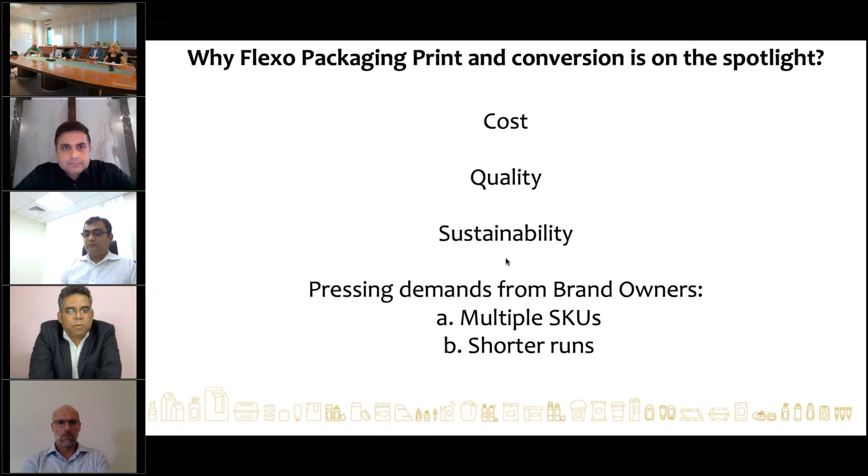Looking at some global trends within the Flexo print process: this is a $164 billion industry around the world, with a 2.6% CAGR expected in the next 5 years. If you look at the divide between Flexo and Roto as a process, North America, Europe, Asia, and Middle East and Africa are so much different. North America, being a very mature market for the past 15 to 20 years, has seen a great transition happening from Roto to Flexo, where Flexo has taken over almost 80% of the share.

80% of flexible packaging print is in Flexo now in North America, which is a great achievement. In Europe, it used to be driven by Roto, but now there's more balance and a move towards Flexo. In Asia, it's the opposite of North America, because of the higher volumes and population demand.

So Roto is still running high and demand for Roto is pretty high. But Flexo is growing at a much faster pace, and we see Roto gravure printers who already have gravure presses investing in Flexo presses to complement their long-run jobs. The long-run jobs run on Roto, whereas short-run jobs with multiple SKUs, they try to do with Flexo. Our panelists will share their thoughts on this.

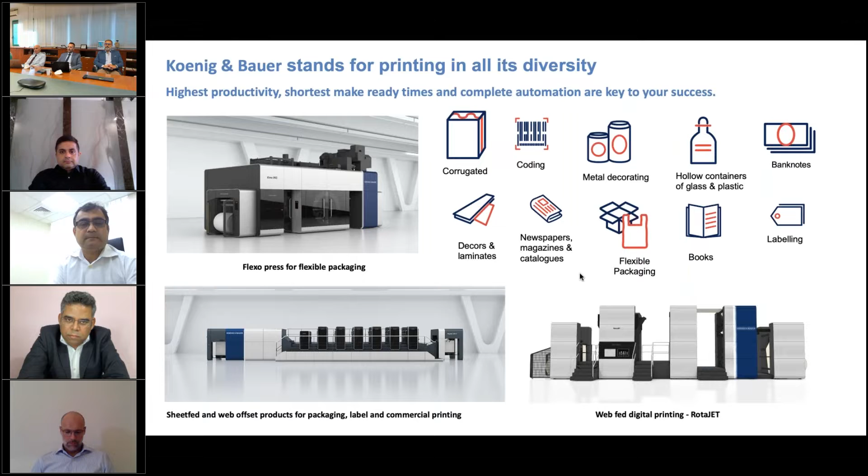But let me come back now to your question related to the growth in popularity of central impression Flexo press in the last years. I'd like to share with you the feedback that we got from our customers and from the market. I'd like to mention three different reasons.

The first one is flexibility. Flexibility means the big opportunity to use the Flexo printing machine with different types of inks, not only solvent, but also water-based inks or UV, can be traditional UV or UV LED inks, EB inks, and hybrid solutions. Hybrid means the possibility to use the same machine with a combination of different types of solutions.

But flexibility also means the possibility to print different types of substrates. Not only flexible packaging and plastic films, but also paper on the same machine, and alufoil starting from 12 microns.

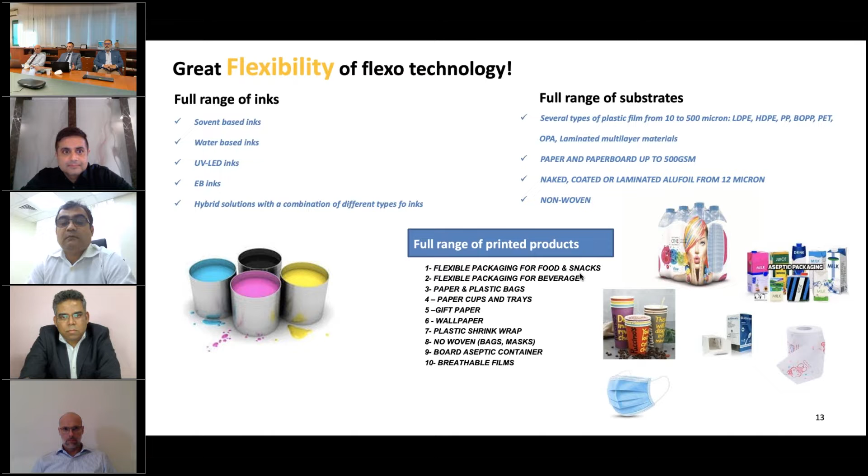So our customers can offer a big product portfolio: materials for flexible packaging for food, snacks, and beverage, paper and plastic bags, paper cups and trays, gift paper, wallpaper, plastic wrap. Nowadays, for example, masks, board aseptic containers, and breathable films. This is the first benefit, but now there is another important benefit I want to share with you.

Next is productivity and efficiency. In more than 40 years, we introduced many high technology features on our machines. Why? Because today, as you know, Flexo printing technology is very close to short run, so with two systems, these two devices, we reduce downtime of job change to a minimum.

The first one is the wash-up system, Speedy Clean. This is an automatic wash-up system that allows our customers to wash up the machine completely in less than 4 minutes. In many cases, the customer also needs to switch the machine from solvent to water-based inks or vice versa, and we can supply an additional independent washing inking system. In this case, the customer needs no more than 2 hours for the complete switch.

The second device we introduced is PrintTronic. PrintTronic is a Flexotecnica patented automatic impression setting system that we can supply on our machine. In less than 6 minutes, guaranteeing no more than 30 meters of material waste, all the pressure between the drum and the plates is completely set.

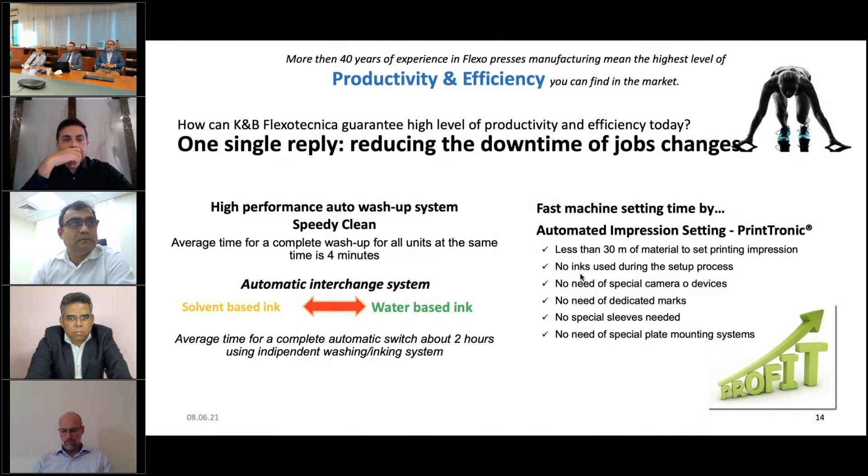The third benefit I want to mention is sustainability. Today for Koenig & Bauer, sustainability is one of the key drivers in the packaging industry. So how is Koenig & Bauer Flexotecnica improving sustainability in Flexo technology today?

I can mention just three ways. The first is developing, through strong cooperation with many partners and suppliers, new technology and processes creating bio-based and biodegradable plastic packaging. The second is continuous lightweighting of material in order to achieve the same performance but using less material.

The third way is pushing the market toward the use of barrier protection coating through some downstream installations in line, and also pushing the use of water-based instead of solvent, UV LED Flexo presses, and hybrid solutions.

Just to remember, Flexotecnica was the first company in the world to introduce the hybrid machine - hybrid meaning a machine designed to accept water-based and solvent-based inks at the same time.

And then what about green? How can we take care of the environment technically? I can mention three different points we offer today with our machines: the lowest emission, noise, and consumption. We optimize the ink and solvent use, and we minimize material waste.

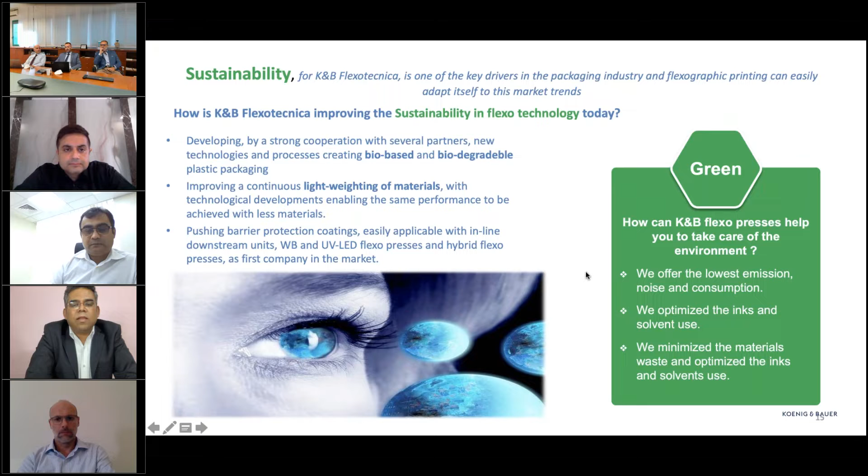Yes, of course. Koenig & Bauer Flexotecnica strongly believes that industrial analytics has never been as important as nowadays. I prepared just these two slides for you. In this way I can explain that in all our machines recently we introduced the new VPN system.

This device can easily monitor all the process data collected from the several sensors installed in all our machines. Then the customer can easily display all the production data, all the information concerning printing, production, and so on.

The customer can analyze all this information to optimize the process and reduce production costs. To be more technical, I want to list the information you can get on our machine - if you can show the next slide, please, Ben.

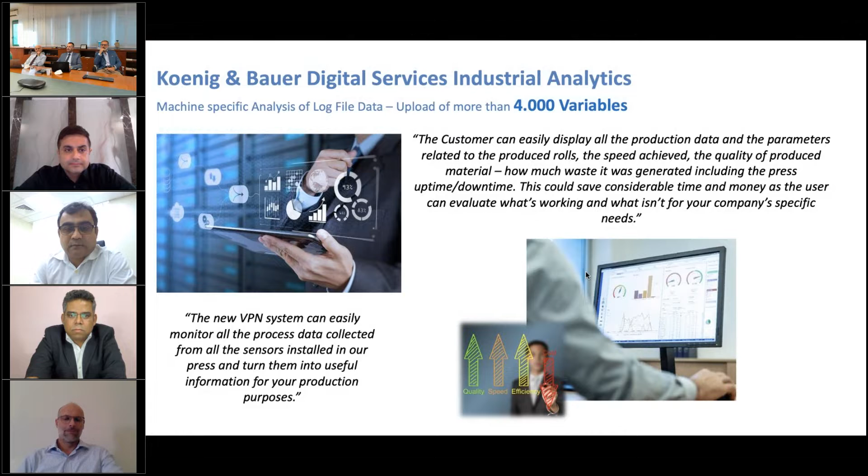Sure. Utilizing our software today, the customer can collect all the information on the consumption of inks, energy consumption, compressed air, waste, and solvent.

Another important thing is that all this data can be collected and managed not only on company software or company computers, but also on normal devices that we use nowadays, like tablets and smartphones.

Thank you so much, Stefano, for your insights.

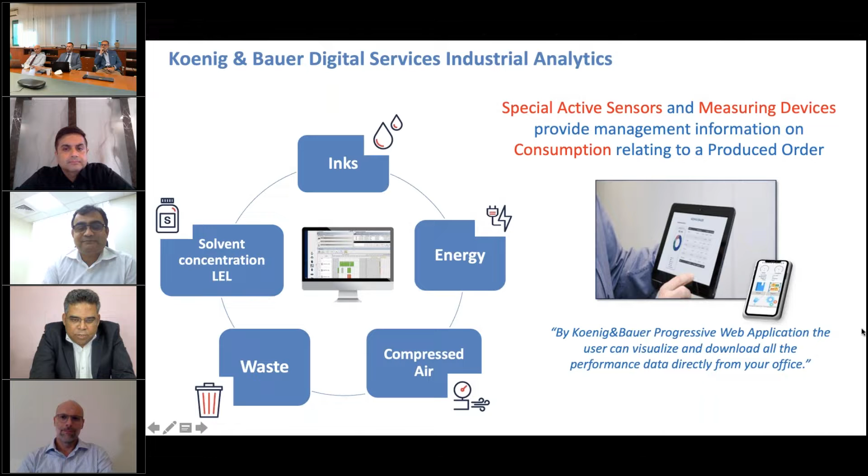So moving forward, what we're going to do now is invite two of our very important regional speakers or panelists in our midst, starting with Romeo Bandini, who's a general manager at IPAC Abu Dhabi.

Hello, Romeo. Hello, hi. I have to say it's going to be an interesting session today because we have suppliers from Italy and Europe, and from our region, from Dubai and Abu Dhabi, yourself and Dharmesh.

So it's going to be interesting to see how we have a balance of both experiences - one from the end user with Flexo, and the other from the manufacturer.

So moving into your experience, Romeo, you have a world of experience with print for packaging, especially with both rotogravure as well as CI Flexo, with your previous job experience on rotogravure and inline Flexo. And now you made a very challenging move towards CI Flexo for aseptic print.

So please take us through your experience and your thoughts on why Flexo is more than just an alternative according to you, and also a proven technology to be reckoned with for our Middle East and Africa regional printers and converters.

Over to you. As I shared with you earlier, I started my career with the biggest multinational company in aseptic packaging, and at that time in Italy, we had both rotogravure and Flexo. Then I moved to a factory in Taiwan where we even had offset printing. Now, when we invested, maybe if you go to the next slide. Welcome, since now you are with me, we are at IPAC.

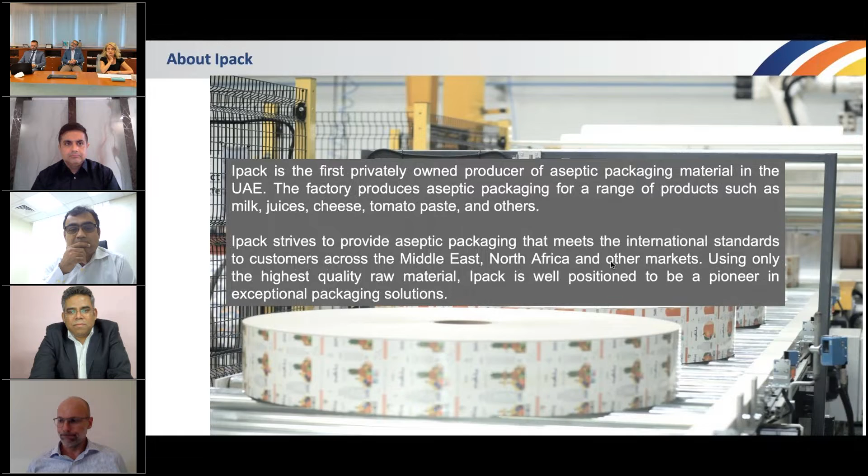We started only in 2016. That was when I came here, as a consultant, helping to design the factory. I liked this project from the start because the investors didn't want to cut corners, and they gave us a mandate to invest in the best technology to be able to serve the market.

When it came to automation, I'll show you a slide later - we basically adopted the latest automation for everything. And when it came to printing, we had no discussion at all - we went straight to Flexo CI. Our bet at that time was to introduce Flexo CI with 7 color separation, with Equinox. That has proven to be a winning bet, because the more we used the 7 color separation, the more we reduced the number of inks we use, improved our printing quality, became more flexible, and reduced our costs.

So everything came together. We used the latest technology, and we have been successful, as the numbers show. In 2017, one year after we started our first production - one year after the groundbreak - in November 2017, we participated at Gulfood for the first time. Just a few months later, in April and May, we managed to get all the IMS and BRC certifications. By the end of 2018, we had already sold more than 1 billion packs. Then in 2019 we doubled that, and in 2020, in spite of the pandemic, we almost tripled what we started with.

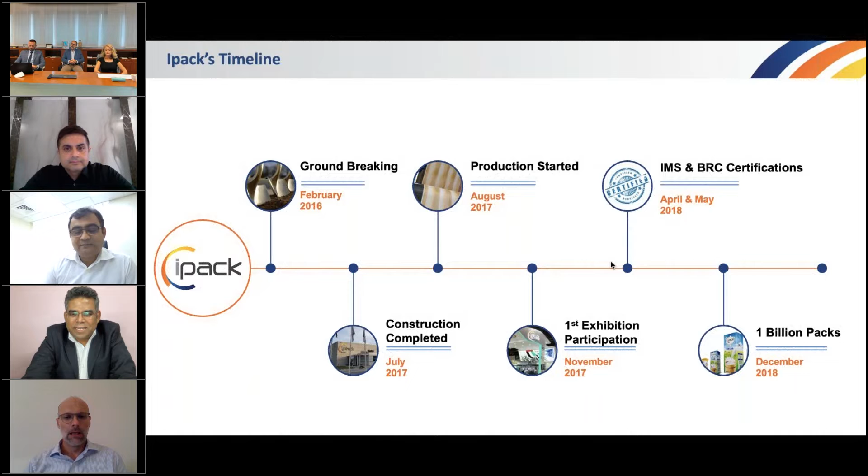If you can go to the next slide - just to show you a highlight of our factory, this is basically where we are. You can see on the top left, the LGVs, so all our warehouse is managed by these automated guided vehicles, and all the machines - the system is all integrated.

On the right, top right corner, you see only 1 printing press - today we have 2. The factory is very optimized: you have 2 printing presses, 1 laminator, and the slitting area, and the warehouse serves directly to the factory. Everything is managed electronically - all the transportation, all the incoming goods. We've invested in 2 KUKA robots, and at the moment 4 plus 1 on the way, plus 1 LGV coming for the end of this year.

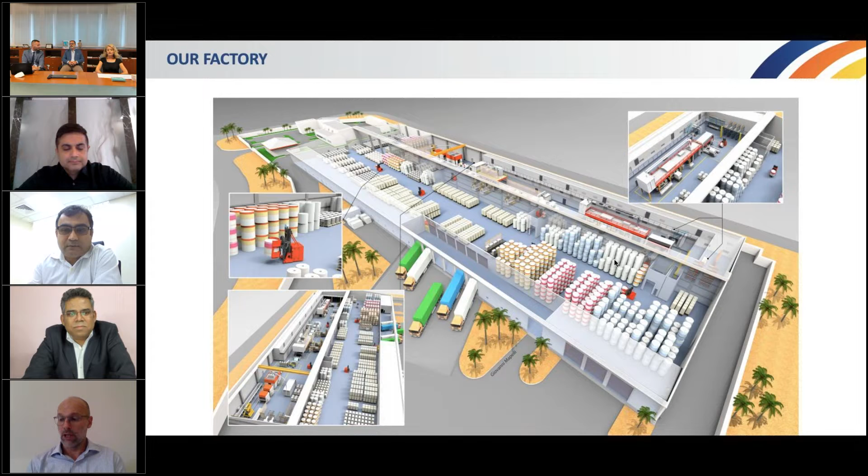This is where we are in terms of technology. We use the latest printing technology, high printing quality, 8-color CI printers, 4 to 7 color separation. 4 because the industry was based on 4, so some customers say they don't want to change and want the same design as before. But when we want to take advantage of our higher printing quality, we propose 7-color separation, which allows the customer to be more flexible since we have more combinations, so we can do co-printing without limitations on the inside. This has been a big plus for both us and our clients.

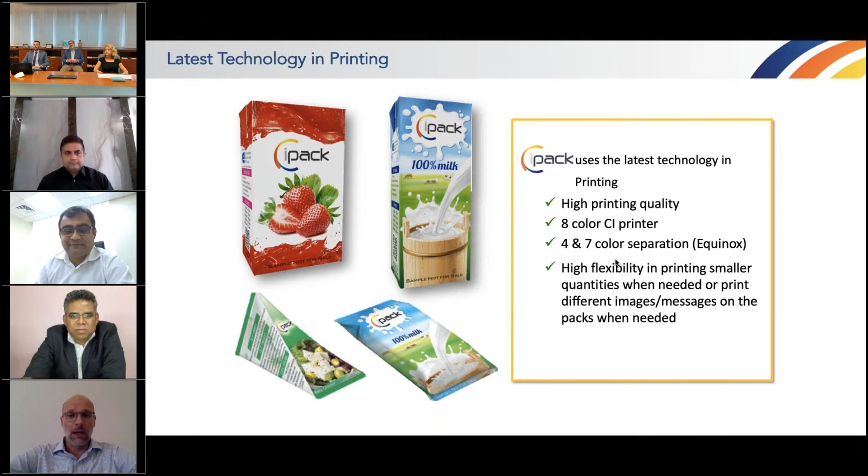Brilliant, thank you Romy, that was a great presentation, and you explained the automation part so well. I was at Romeo's factory a couple of years back, and he showed me the entire factory and the automation. I must say, although I've traveled around the Middle East, it's one of the most automated facilities in the region. I'd like to congratulate Romeo for that great accomplishment. Thank you, Ben, I appreciate it.

Moving forward, we saw the aseptic side of the Flexo business, and now we're going to look at another very interesting side, the flexible packaging print business. I have the pleasure of inviting Dharmesh Laveri, General Manager of Hotpack. Dharmesh, like Romeo, you've gone through quite a curve of understanding Rotogravure and Flexo as technologies which have complemented each other over the years. Please share your thoughts, because in your previous job you did a lot of research on CI Flexo before investing in one, and even in this job you work a lot in this area. It's an interesting analogy to check Roto versus Flexo for flexible packaging, given that you have multiple layers, printability issues, and other challenges, which I'll leave to you to discuss as the expert.

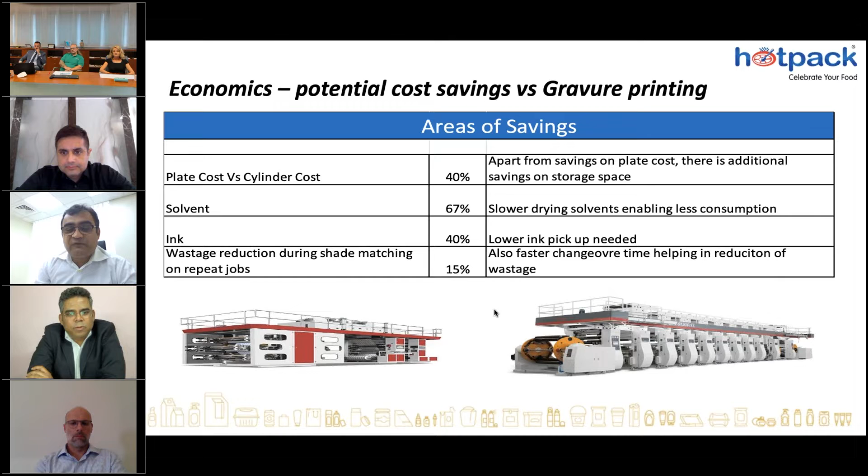These are phenomenal figures. Wow. Right, yes. So just to give you an example, because the type of products that we do at Hotpack, one of the things which makes us different from others is that we cater to all types of requirements.

As you see in my earlier slide, customization choices is becoming very important. Within this region, in the disposable segment, in the hot and cold cup segments, we are one of the largest producers here in the Middle East. Within that category itself, what we have tried to do in the market is disrupt it by giving a lot of customization. So even if somebody wants very short runs with a certain amount of customization, we are able to handle that. That is happening only because we have multiple technologies, and Flexo is playing a major role. That's where we are able to cater to this particular demand in a changing environment.

Right, brilliant. Thanks a lot, and I would be able to address questions if there are any. So thanks, definitely Ben. Thank you so much, Dharmesh.

I think Romeo and Dharmesh, both of you will definitely have a few questions to answer, because it's very interesting to know your take on CI Flexo as a technology. And we are not only speaking here in this webinar, we are also experiencing what these two renowned converters have gone through with this technology, which has become more mature now, let's put it that way.

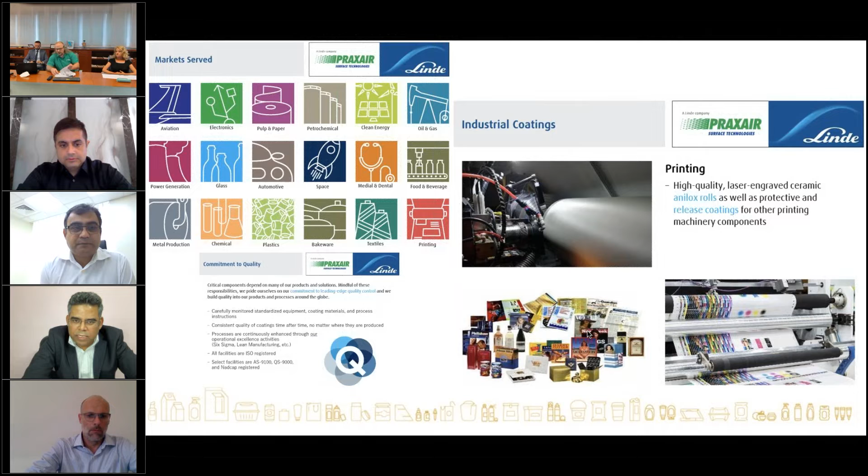Going deeper, if you can go further... thank you. So here you have a sample of how many different shapes of engraving are possible. These are real pictures of the engraving possibilities from our company, and there are even more - we are always developing this.

Why do I show you this? Because you mentioned the different support and different kinds of jobs you can do, and you mentioned sustainability and flexibility. When you use, for example in Flexo, water-based ink, you can choose the right product, the right Anilox for you. So the Anilox is the core, the beating heart of the metering system.

You have the Doctor Blade chamber, the Doctor Blade - the inking system - and then you have the Anilox which transfers the material, the liquid, to the plate. In flexography, you can very easily change your job by changing the plate, and also easily change the metering system by changing the Anilox. If you use an Anilox sleeve, you're very fast.

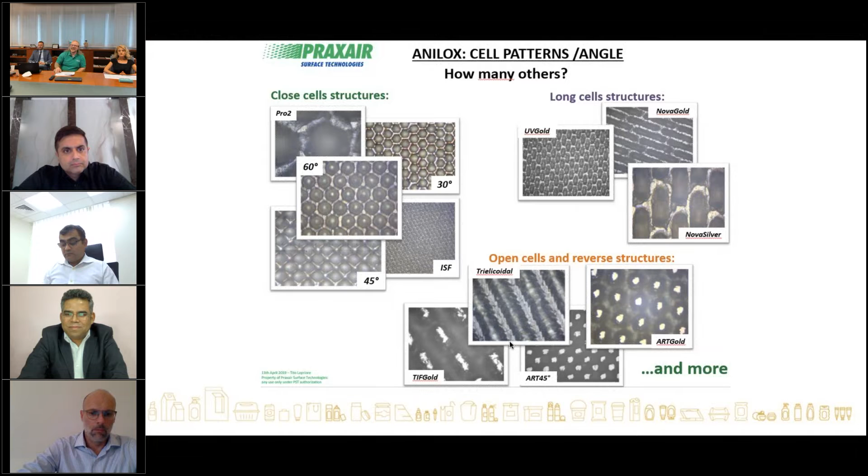So you can change, you can jump. So we go, I'm sorry, I'm not a technician, I go very deep into technical details. So let's jump to another slide, to the next one.

Then you have to focus on density. On density, depending on the shape of the engraving and the screen count, you have a certain possibility to have a volume on the Anilox. All these things to say: choose rightly your specification of the Anilox. This will help you a lot, and this gives you the possibility to create less waste of material, less stress.

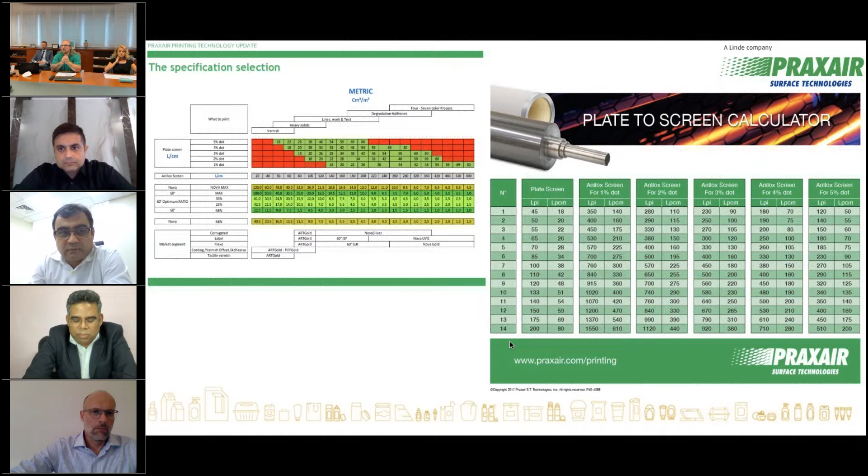And even to save ink. So ink costs money, huh? So sure, you can go to the last one. Sure.

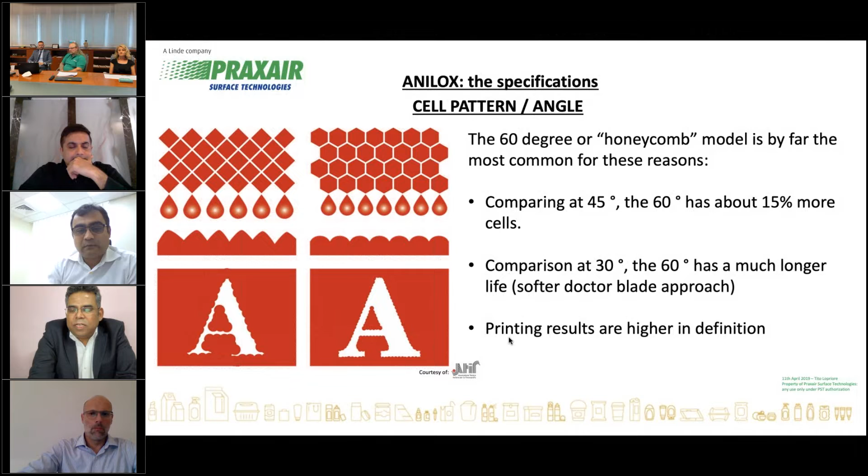Thank you very much. I also want to ask you another question, which is one of the main elements of today's webinar: how does the Praxair component contribute to the sustainability of the process? In what way does Praxair contribute to sustainability? If you can share with us, please.

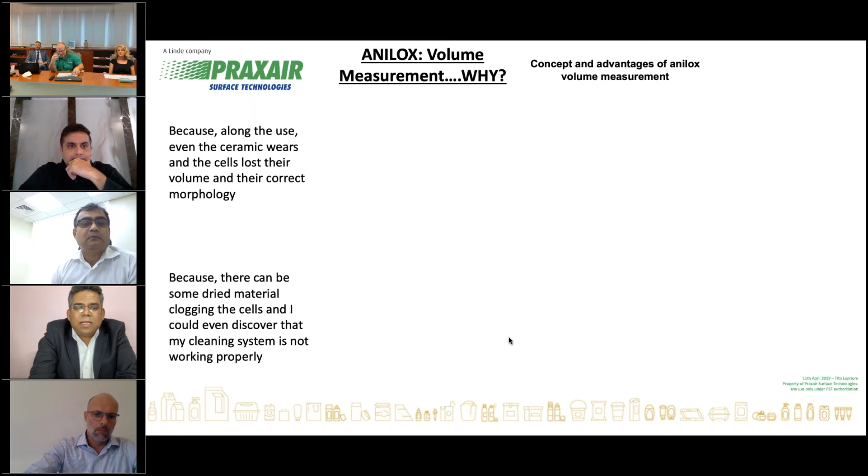Yeah, so the Anilox is not exactly the more eco-friendly product, it is a component. But first of all, you have to consider that the Anilox can be refurbished. So you buy a new one and then you can refurbish it for a certain amount of times, depending on its shape, its condition, how you manage it. So then Anilox, of course, are not eternal, you have wearing of the Anilox.

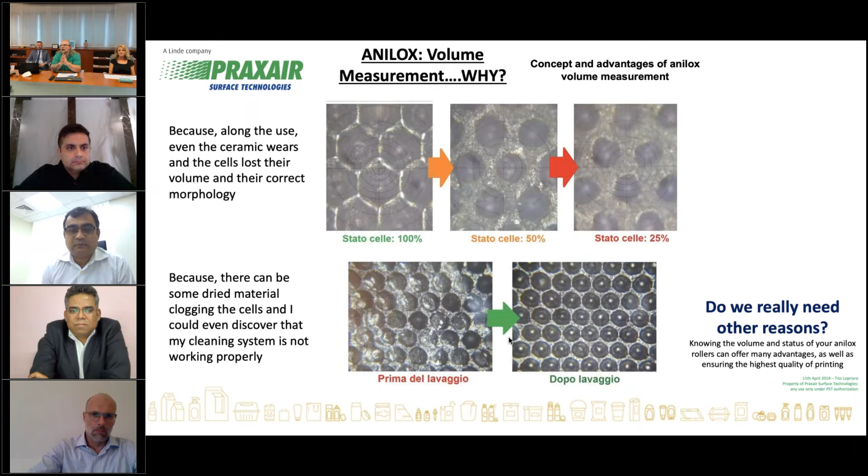So you have to check your equipment, and when you can check your equipment, you win, because you can predict the result that you will have. So you can plan the job run that you have to face, that you have to do, and this is another question that goes into saving production in Flexo printing.

Then again, I repeat myself: consider all the time that you will maintain on changing jobs, when you just change the blade, or you have also to change the Anilox in a very fast way. So energy, extraction, and all that stuff.

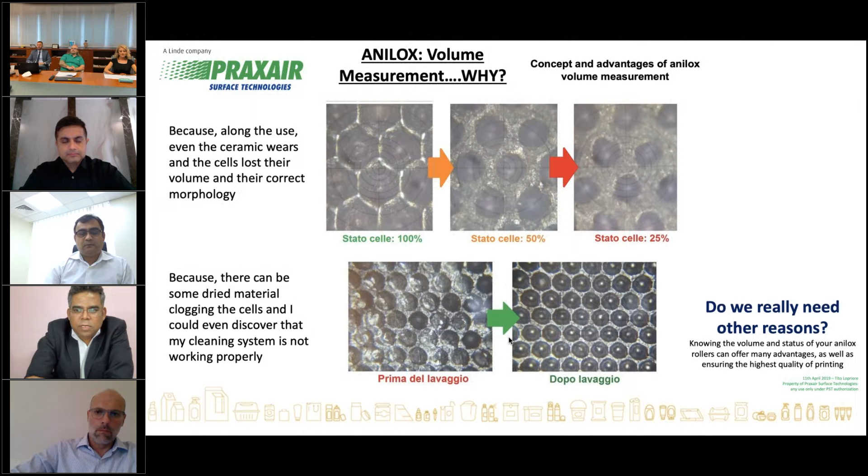Brilliant, thank you so much Tito for your insights on Anilox, which is one of the most important elements of Flexo print. Moving forward, there's another very important subject for discussion, which is ink viscosity, and we have with us Giuseppe, who is the area sales director for GAMA International. So welcome, Giuseppe. Thank you.

So Giuseppe, there's a very important element when it comes to ink viscosity. Why do you think the viscosity system is so important for the quality of Flexo print? Could you share with us your details? What do you think is the main reason?

Yes, first of all I would like to speak about GAMA. GAMA is an Italian company, founded in 1993, and we started to produce viscosimeters for all types of machinery. We supply viscosimeters, of course, for Flexo machines, for gravure machines, for laminators, and other models.

After many years in contact with our customers and press constructors, we decided to change the model, because this model is complicated and needs maintenance, as it's necessary to clean it very well. So some years ago, we started with a new model, a new idea: the vibration system. This means you have a disc rotating in the inks, and as the viscosity changes, the vibration of this disc also changes.

This vibration is connected to the viscosity.

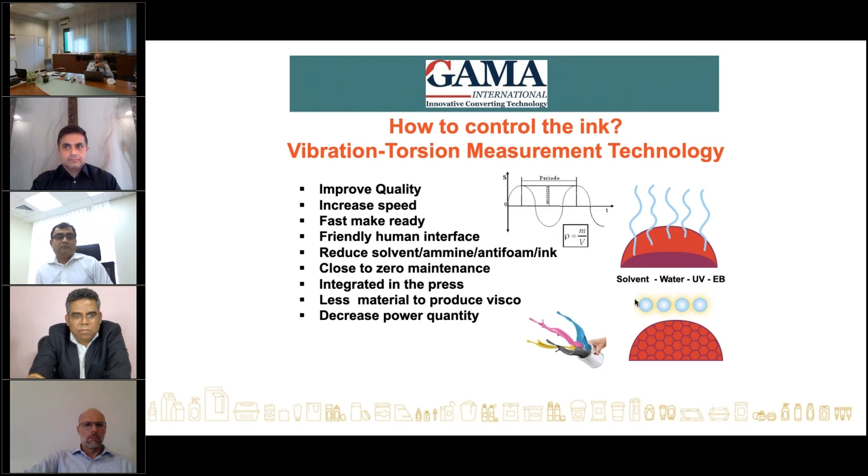As I said before, with the viscosimeter you improve the quality of the printing, because when you check manually, it depends on the technician of the machine. There are big companies here where, when you print, you have many problems with the machine, register, doctor blade, and so on. At the end of the story, checking the viscosity is your last problem. For this reason, if the machine is running well, you have time to check the viscosity many times; if you have other problems, the viscosity becomes your last priority.

For this reason, many times you don't have very good quality, because if you do this job manually, you don't check it often enough. After this, of course, if you have good ink viscosity, you can increase the speed. You also have a faster make-ready and a friendly human interface, because when you start the first production, you check exactly what the good, exact viscosity is for each color.

Afterwards, you can store all the data on the PC, and when you do this job in the future, it's not necessary to check color by color again, because you have all the numbers stored beforehand.

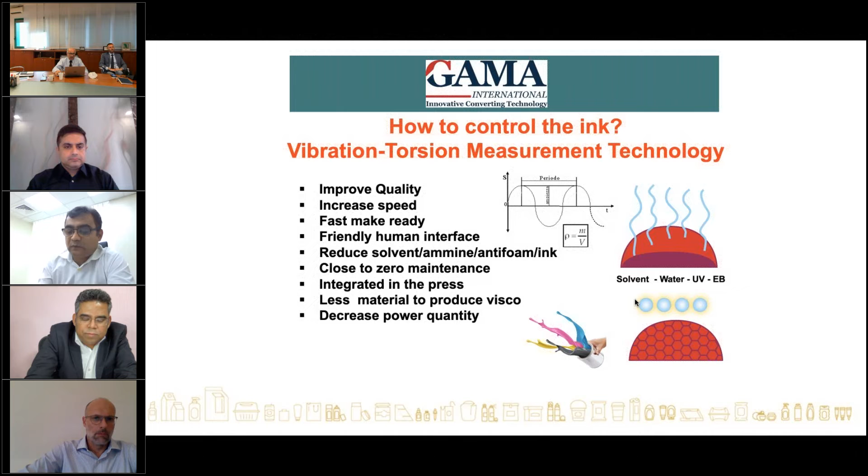Yes, Flexo started to print with water-based inks on flexible material. I come from the gravure market machinery. I remember that 30 years ago, gravure started printing water-based inks, but only on paper and special materials, not on flexible material.

Flexo started to print with water-based inks, and according to press suppliers and ink suppliers, we also developed a special viscosimeter, because in water-based inks there are three parts that are very important to check. The first is of course the viscosity, but it's also very important to control the pH and the temperature of the inks. The pH in Flexo water-based inks is usually approximately 8.5 to 9.

Why is pH important? Because when the pH decreases, the viscosity increases. This is important because there is a problem with the inks: if the pH decreases, it can change the resin solubility and change the ink. There are problems with anilox cell occlusion, and what's important is that it becomes very difficult to dry the material when the pH increases.

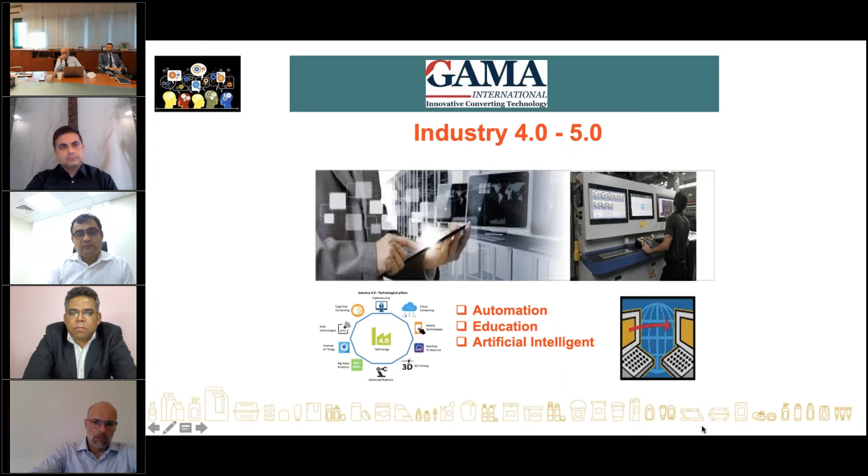In your country, the temperature is higher, and in this case you have big evaporation, which is a problem for the operator because it is a danger, and also money that goes outside. For this reason, in recent years we started to produce a special system to cool the ink in gravure and Flexo machines, especially with solvent-based ink.

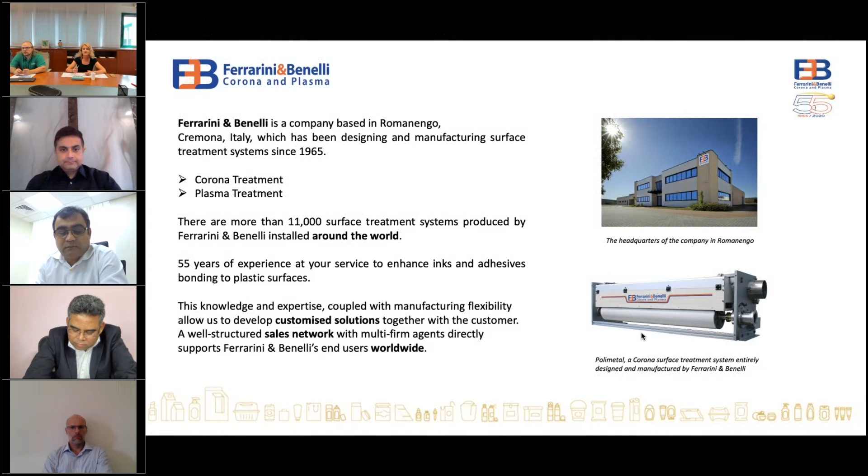So let's go back to your question, how Corona treatment in flexible packaging can help in Flexo. The purpose of Corona treatment is to increase the surface energy of plastic films. Generally plastic films have low surface energy, and the purpose of Corona treatment is to bring this low surface energy to high surface energy. In this way, the inks can adhere to the substrate where we want to put them.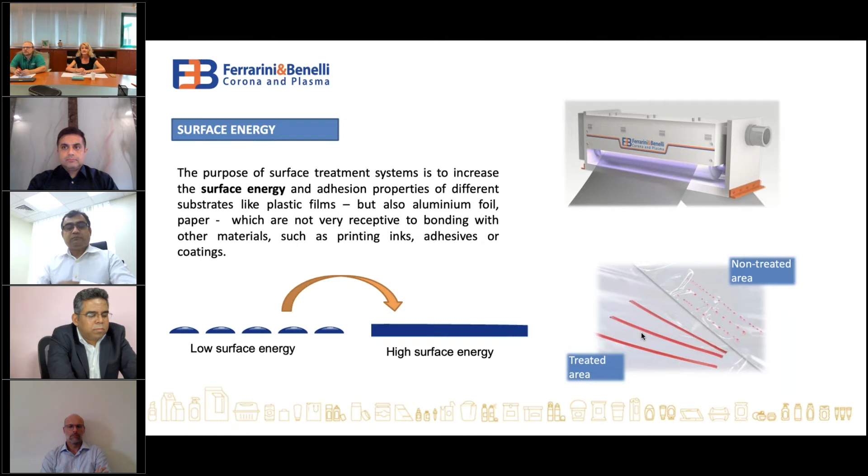In general, plastic films, but also aluminum foils and metallized films, are not very receptive to this bonding. This is why we need to enhance the surface energy. What does the Corona discharge do? We have to remember that all plastic materials are generally treated at extrusion in order to achieve a high surface energy.

But during the time passing between the extrusion process and the converting process—in this case we're talking about Flexo, but this can also be said for laminating and coating—there is a decrease of the surface energy. We mentioned before that the quality of the print is very important in Flexo, but we cannot achieve good quality if the bonding between the ink and the plastic film is not good enough.

You can imagine how many bad consequences there could be if this bonding is not good. It's not only an effect on print quality, but also possibly a failure to comply with law or customer technical specifications. This could also bring waste of materials and waste of money. So it is very important that we can treat all these materials, plastic films or whatever, by Corona treatment, and bring them back to the correct surface energy in order to avoid losing money and wasting materials.

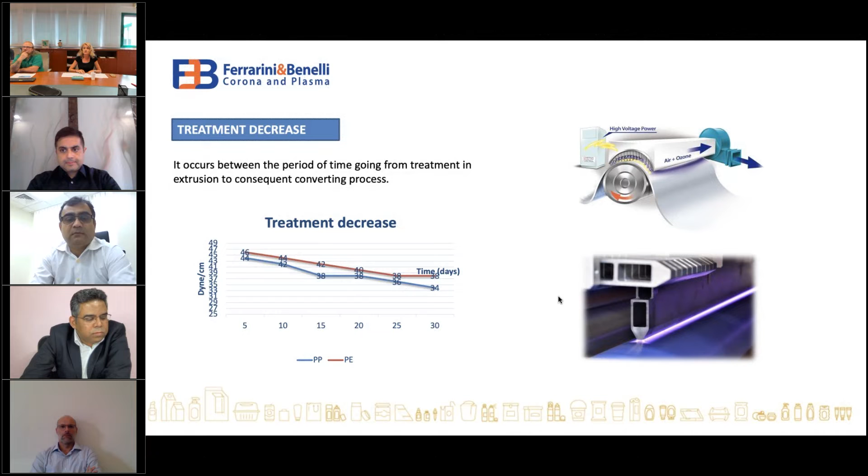We made it by means of what we call a reinstatement of treatment, because basically all plastic materials have been treated in extrusion. So as we mentioned before, they can lose their value because of additives and slip agents that grow up to the surface. So we need to make a booster corona treatment in line in the Flexo press. This will bring recovered materials that have a decreased surface energy back to the correct surface energy.

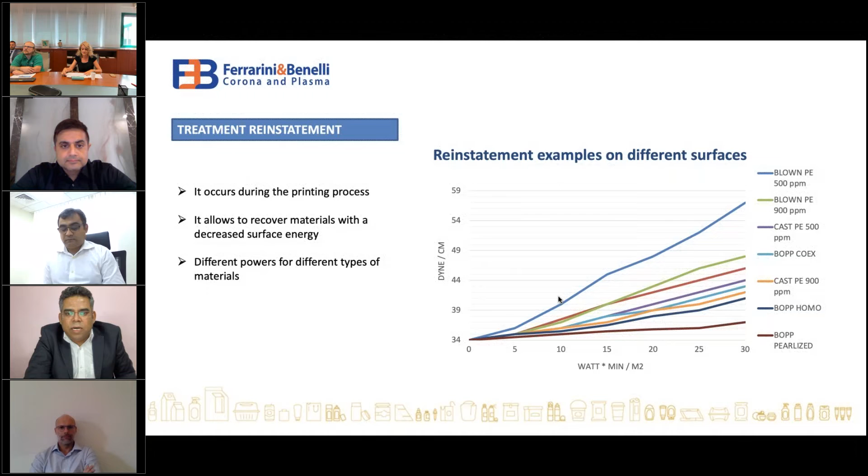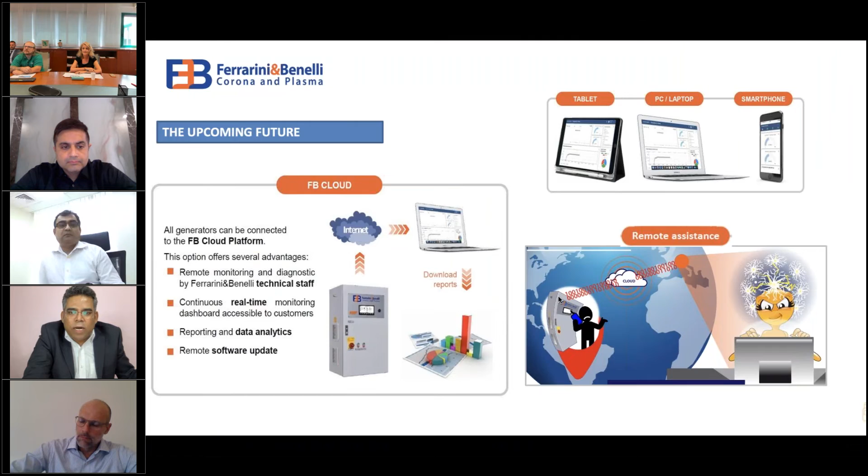And last but not least, I think it's a very important part that you cover, which is the quality control system and inspection. So if I can ask you, Paolo, how does grafiKontrol respond to the constant demand from customers to improve print quality? That's a big challenge right now. And at the same time, as you increase or enhance print quality, you need to reduce waste, and also increase productivity and efficiency. So through your systems, how are you able to accomplish or achieve this? If you can share your thoughts, please.

Okay, first of all, good afternoon to everybody. Since I'm the last one, I'm trying to concentrate everything. So, grafiKontrol, who is grafiKontrol? We are the guys who check if the job done in every process is properly made.

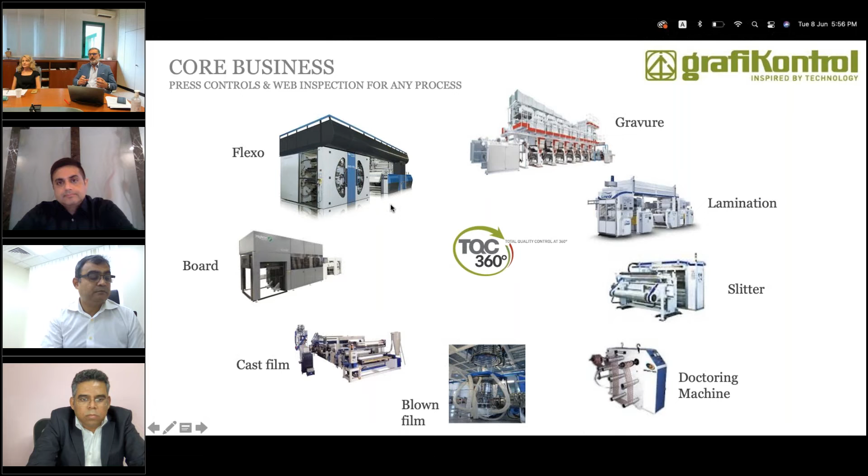Can be a printing process, can be a substrate process, can be anything that happens in every single process. You must have something, a device that catches the defect and is able to communicate to the following process that something happens. Because the problem is, if you can go to the next one, the problem, for example, in a typical process, we are printing, lamination, slitting. The problem is yes, catching a defect in every single phase, but the most important is being able to remove the defect and not deliver a product to a customer with defects. So all the phases that you can see in these slides, we can intervene by putting a device that catches the defect and then communicates with a concentrator of data in order to communicate where the defect is.

Just an example, when we laminate a printed roll, we have from one roll maybe 2 rolls. It's difficult for the operator then to know where the defect is, the location of the defect.

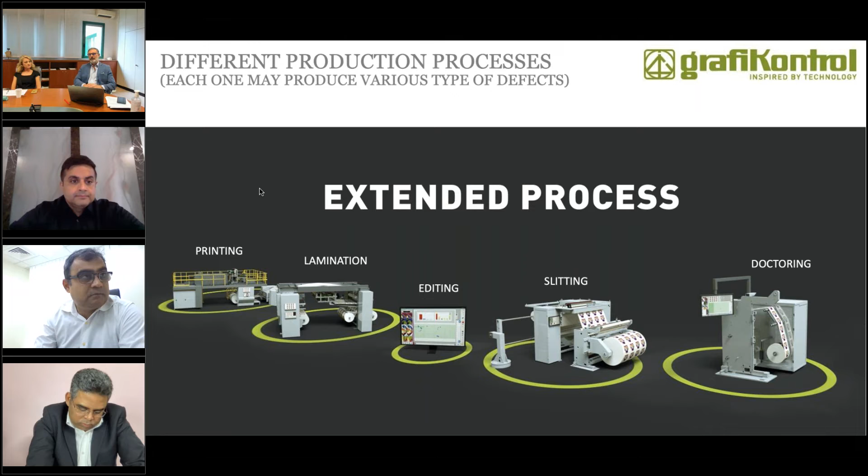You can go on the next one. And these are just typical installations. For example, on the top left, we have a typical installation on a Flexo press where we have 100% area camera and inline spectra. That's very important because certain things you can only measure at the end of your roll, but during production it's very difficult. So for both print inspection, but also maintaining the color, the only way to maintain the color is measuring while you're running. And there's a dedicated device like the inline spectrophotometer to do that.

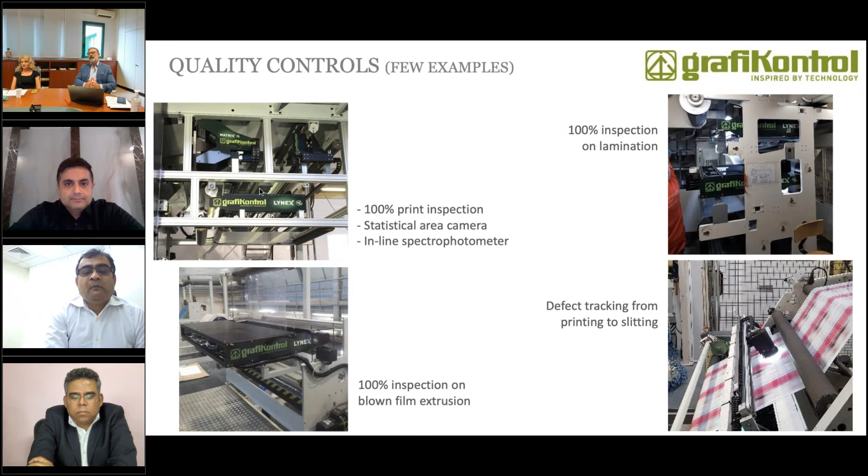Then we are also on the blown film extrusion, because also that phase you might create defects on the substrate. Then we got the next step on the lamination. Also, when you laminate 2 layers, you might have some problems. And then on the slitter, we need to be able to stop the machine and remove the defect that you don't want to deliver to the final customer.

If you consider, for example, how we improve the efficiency and also the sustainability, you consider a roll. Yes, a roll contains a lot of defects coming, as I said, from different processes, from a substrate or from the process itself, during the working of that roll.

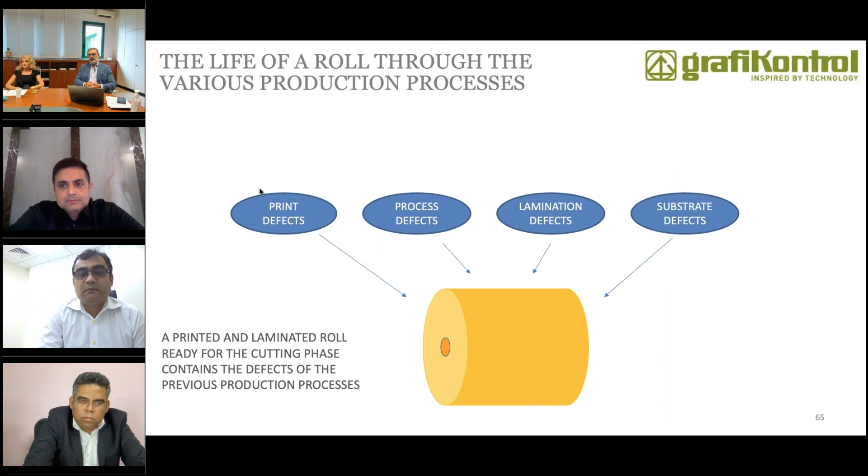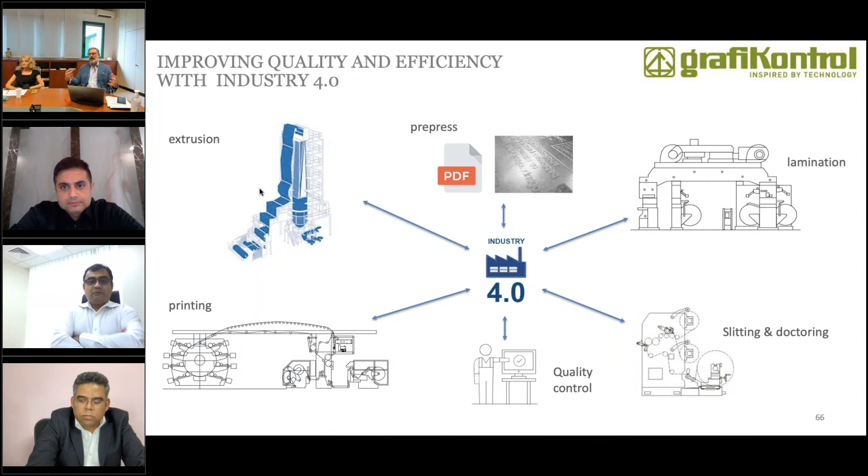So to avoid, or to increase the quality of your production, if you go to the next, we've been using the concept of Industry 4.0 from pre-printing, from pre-press until the last stage, which is the slitting, going through the lamination. What that means is that all the different processes are communicating with each other. If you go to the next, so in our case it's getting information from every single process and concentrating the data, distributing the data to the next processes.

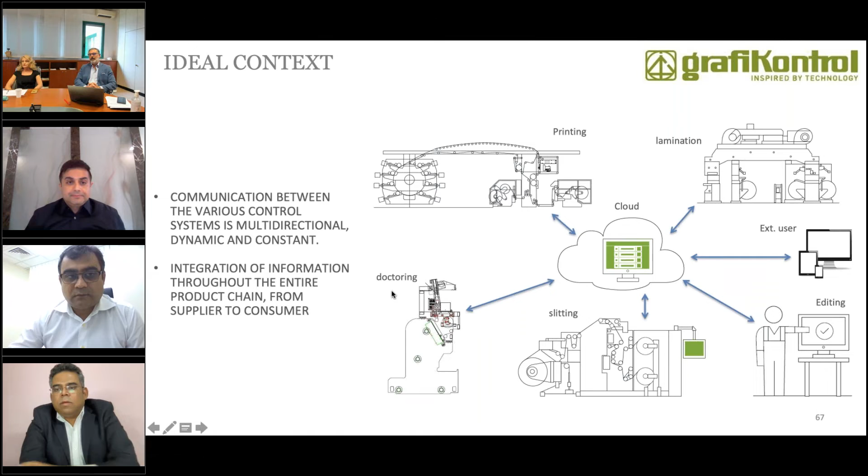Avoiding producing more waste, which translates into complaints, friction between printer and customer, and the opposite of sustainability. Because if you deliver a product with non-conformity to a final customer, you may have a rejection. So you have to either reprint or dispose of the material. So this is our concept of increasing efficiency and maintaining sustainability.

Wonderful, wonderful. Thank you so much, Paolo, for your insights. So, ladies and gentlemen, that was a wonderful journey for us to go through, from the machine itself, which is the CI press from Corning & Gore and all the auxiliary equipment. And to complement that, we had these converters, IPAC and HotPack, who gave us their thoughts.